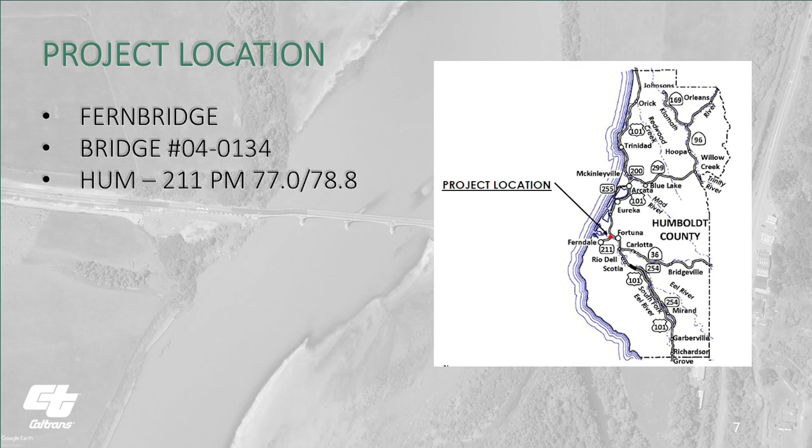In terms of project background, emergency repairs were made immediately after the December 2022 earthquake to restore essential traffic, minimize the extent of damage, and protect the remaining facilities. And now an improvement project has been initiated to identify solutions that will provide safe, sustainable, and reliable access to Ferndale. Update on seismic gates.

This is just a rendering. They were not installed just in the last 10 minutes of you all driving over.

So remaining work is the changeable message signs and the structure associated with those, cameras and poles. We are planning to have some nighttime traffic control in order to do that work. There'll be some crane equipment that will have to come in to place those items. We also have some monitor sensors on the structure that are currently not functioning that we need to replace. I believe, Ty could probably correct me, but I believe there'll be a specialized snooper truck that will go and put people underneath the structure.

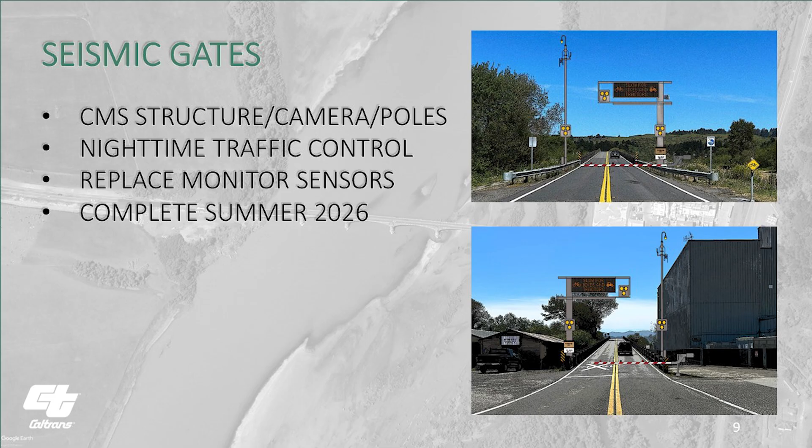I'm not certain if we'll be able to do that at the same time as the other equipment, so there could be, I'm hearing probably yes, a couple instances of traffic control in order to do both of those items of work. But we do hope to complete the work this summer.

In terms of the bridge survey, back in January of this year, we had some traffic control in place in order to do a three-dimensional survey of the structure. One of the main purposes was to establish a new baseline for where the structure's at in terms of crack widths and any potential movement in the future since doing the emergency repairs and some pavement and asphalt work that we had done. And we also set new control points to be able to do future surveys to use as a reference, and again, to monitor bridge movement.

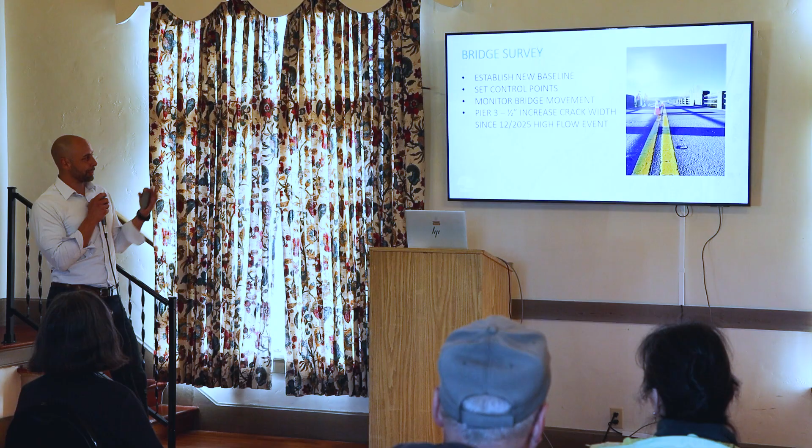In this recent survey we did notice approximately a ½ inch increase in crack width on Pier 3, and that was since the December high flow event that we had. We've since had another high flow event. We haven't done another survey since then, so we can't really predict whether we would expect to see any movement as a result of that, but just knowing that we are monitoring the structure, there's no cause for concern.

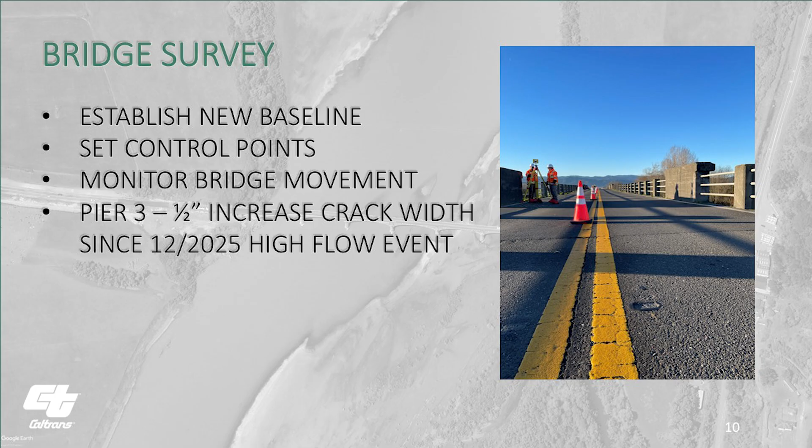Our bridge crews have inspected the bridge, and there's nothing that would need any emergency repairs or anything like that. But we just wanted to be transparent and let you know that's the recent update that we have based on that survey we did back in January.

We covered this last time as well. This is our timeline for project development. We start here in the planning phase. The last phase that we just completed back in August of 25 was project initiation. That document essentially developed preliminary cost, scope, and schedule for the project. And then in August, we kicked off into the project approval and environmental document phase, where we'll be preparing an environmental impact report under CEQA and what's called an environmental assessment under NEPA on the federal side.

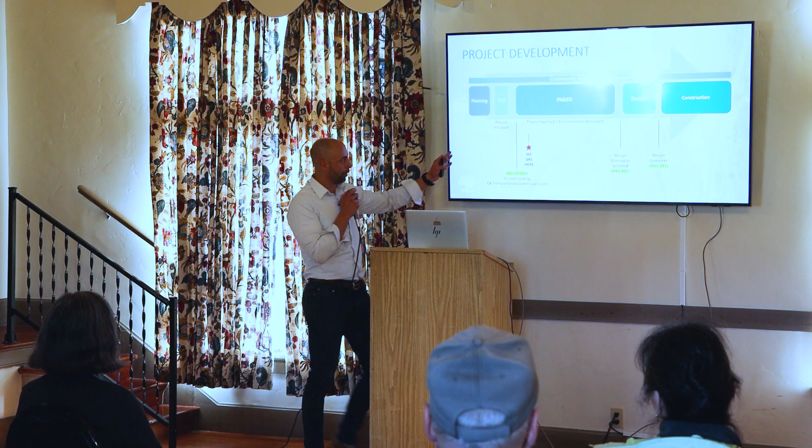So last time this red star was here, so we've gone a little further; it could slide a little further forward or back, but generally we've made some progress. This phase is targeted to be complete in April of 29. And by that point, the result would be we would have an alternative selected. That is the outcome of this phase, an alternative selected that would then move into the design phase to have plans, specifications, and an estimate prepared, which is targeted to be completed in April of 2031.

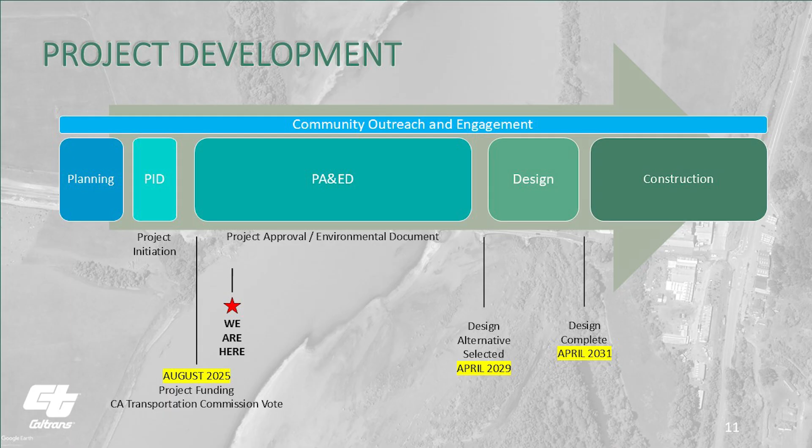And with that, contractors would bid on that plan package and it would be awarded to the lowest responsive bidder, and then we'd go into construction at that time. Timeline for construction is kind of a range depending on the alternative, and will continue to shift as we dive deeper into the project and understand more about it. Some of our timelines are a little lengthy right now, but we haven't yet gone through the effort of looking at ways of making the construction timeline more efficient and tighter to shrink it down. But we'll talk about that in a little bit.

So what is PA&ED, the Project Approval and Environmental Document phase that we're in now? It's a phase where we prepare an environmental document, we perform our environmental technical studies, we do preliminary engineering and alternatives analysis between all the alternatives that we're currently looking at. We do community engagement, which I forgot to mention, if you notice, community engagement spans all phases of the project. So that'll be something that never stops. We will always be engaging with you.

And on a project like this, more so than you would probably ever see on most projects that Caltrans is developing. We'll also kick off agency coordination with all the resource agencies, such as the Coastal Commission and other agencies that we will require permits from, and they'll have an opinion and say in the outcome of the project. And then at some point in this phase, we'll have selected a preferred alternative as well, concluding with an environmental document that's certified and approved.

Every project in our department has a very specific purpose and need. The purpose and need really drives everything that we do with the project, why the scope of the project is what it is. So this is almost the definition for what a project includes. So the purpose of this project is to restore reliable access to and from the city of Ferndale for all roadway users, which includes providing a structurally resilient bridge that meets current bridge design standards, reducing risk of damage from future events.

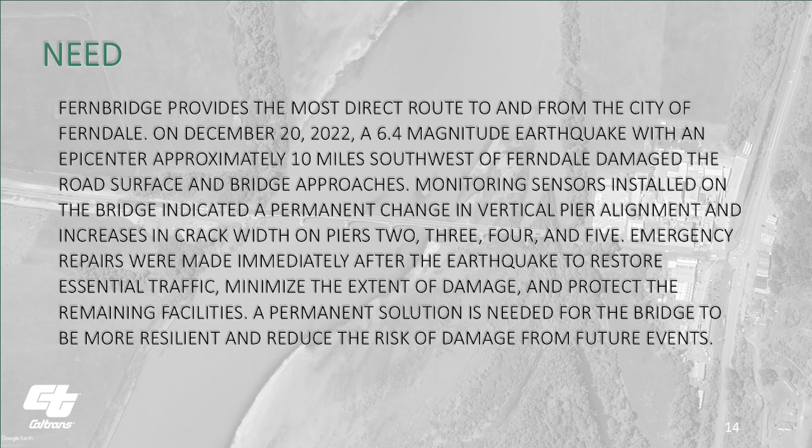Emergency repairs were made immediately after the earthquake to restore essential traffic, minimize the extent of damage, and protect the remaining facilities. A permanent solution is needed for the bridge to be more resilient and reduce the risk of damage from future events. So those two statements are really driving the scope and the work of what we're doing on this project.

Another topic that a lot of us are probably curious about is, are we going to be able to rehab the existing bridge, or are we going to have to replace it? And that's been something that we've been talking about, but we don't have the answer to yet. As we mentioned in our last public meeting, our teams are studying whether rehabilitation of the existing bridge to keep that bridge out there is possible. And if possible, what would this bridge look like? What would the scope of that improvement look like?

So some of the things that we're currently doing right now and will be doing to get to that, and also a schedule to bring a determination on whether it is feasible, and if it is, what it would look like. We're currently kicking off channel surveys with our survey crews to get topographical mapping of the channel between bank to bank.

We'll be doing geotechnical investigations to get soil samples, hopefully starting as early as this summer, potentially in the fall of this year, which is going to be critical for us to be able to do our structural analysis on the bridge to see if rehab is possible and what the scope of rehab would look like. We'll be preparing a foundation report from those soil investigations. Our structures team will be doing a scour and seismic analysis.

And a little note on this, typically at this early phase of a project, we would do a very kind of basic structural analysis to be able to determine what the scope of work would be. In this case, because this is a pivotal big answer that everyone needs to know in terms of rehab versus replacement, our team has decided to do a very intense analysis when it comes to the structures.

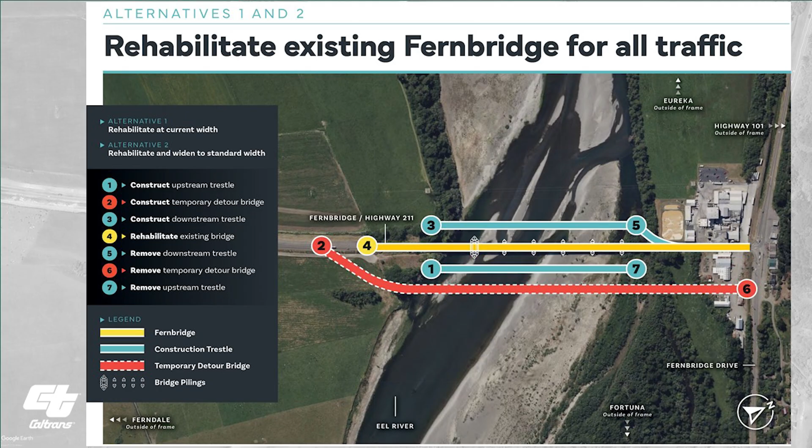So in these cases, you would expect that these lines would be much tighter because we don't need that much width. And I only want to say that because we're showing a new bridge over here through the depot and things of that nature. So that would get much tighter and closer to the existing bridge is all I wanted to say.

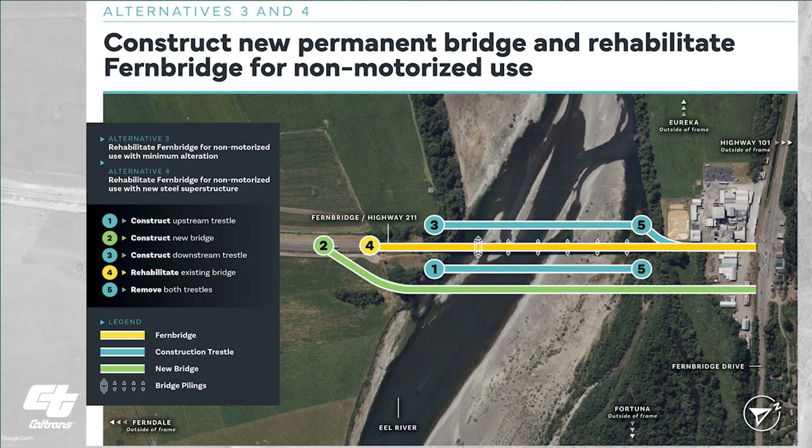So the difference between 3 and 4, alternative 3 would rehab for non-motorized use with very minimal alteration. And then alternative 4 would actually take the superstructure, or the top portion of the structure that has the roadway, and replace it with a new steel superstructure. That would be the difference between 3 and 4. Alternative 5 would construct a new permanent bridge and demolish and remove the existing Fernbridge structure. This one would construct a new bridge on a new alignment, however, even though the existing Fernbridge would be removed.

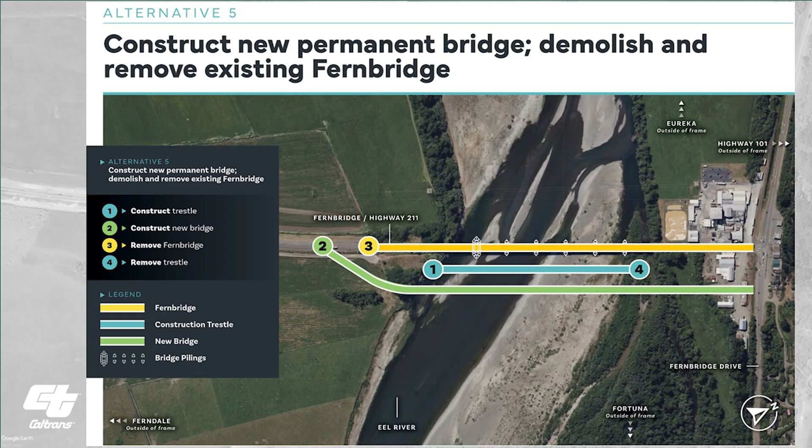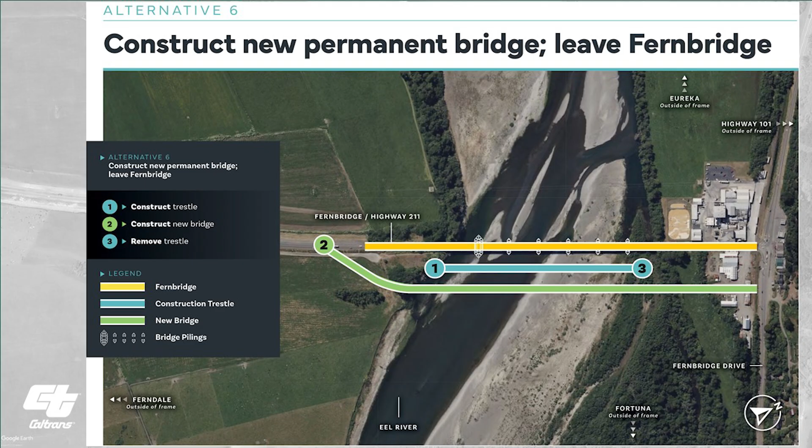Alternative 6 would construct a new permanent bridge, but it would leave Fernbridge. And what we've talked about here is some type of a monument. Whether that is keeping the bridge totally intact there or down to maybe only leaving piers in the water, that is the intent of this alternative. The challenge behind leaving a bridge intact that's historic and not getting maintenance is it's likely a liability because people can recreate under the bridge. So that's not really something we've discussed at length in terms of what does a monument look like. But so monument hasn't been defined, but that's what the purpose of this alternative is.

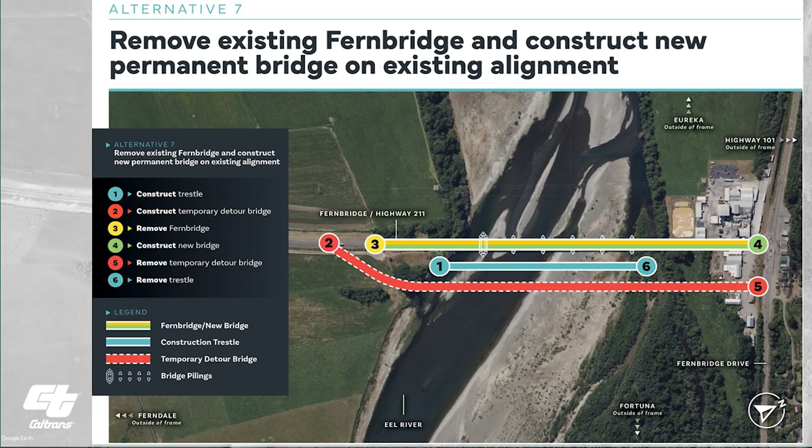And then finally, the last alternative, remove existing Fernbridge and construct a new permanent bridge on the existing alignment. So this one, the new bridge would replace and be exactly where we're driving on Fernbridge today. In terms of lane widths between the various alternatives, alternative 1, rehab the existing bridge with really no changes to the width. So it would just remain with 0-foot shoulders, 11-foot 4-inch lanes, and no separated pedestrian path.

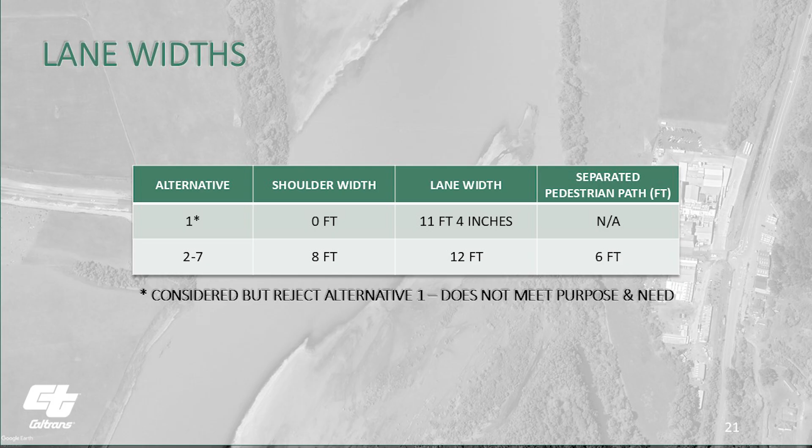There's an asterisk on that because we're actually recommending to reject this alternative, with the clear reason that it doesn't meet the purpose and need. The purpose and need is intended to serve all road users, pedestrians, cyclists, motorized vehicles. That alternative does not do that. And so we are officially now recommending to remove that alternative from the alternatives being considered. And that's why that's there. Alternatives 2 through 7 do incorporate 8-foot shoulders, 12-foot lanes, and a 6-foot separated pedestrian path.

In terms of replacement alignment, so when we're looking at alternatives that propose to replace the bridge, not like Alternative 7 on the existing alignment, but off alignment, we are focusing our efforts now on looking at an upstream alignment. Through our preliminary studies and reviews of the site, any other location is going to have much greater impacts to coastal ag land and take ag land away from the community by rerouting the bridge and 211. Also increased impacts to wetlands, higher construction, higher mitigation cost, much more additional right-of-way, as well as increased in-channel impacts due to additional temporary trestles that we would need with a new structure that's much further away from the existing.

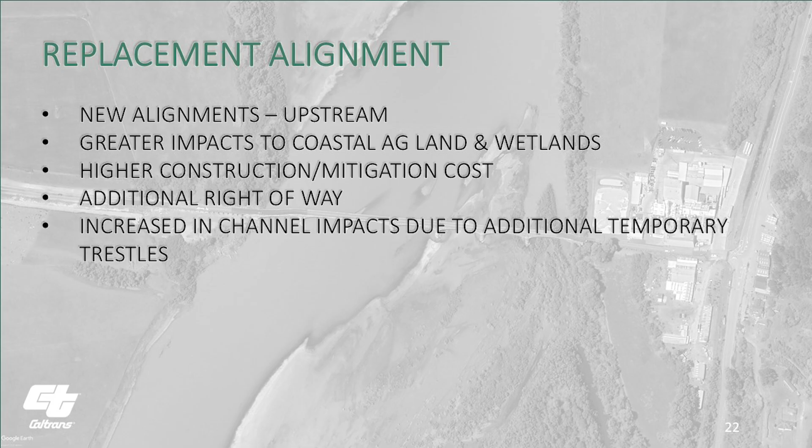So I know that's something that has come up in past meetings where it was asked about and we weren't really ready to answer that question yet, but we are fairly confident now that that is the most logical point for our new structure. We will still be studying the entire environmental study limits that we've identified, which go much further than just that upstream alignment, but that is where we're seeing it likely makes the most sense for a new structure if you have to build it in a new location.

I'll run through that construction staging example really quick just to help it make sense for everyone. So this says alternatives 1 and 2. We are recommending now that alternative 1 is not going to be an alternative further considered. So really you just focus on this for alternative 2. This would be rehabilitating it for all traffic with a wider standard width.

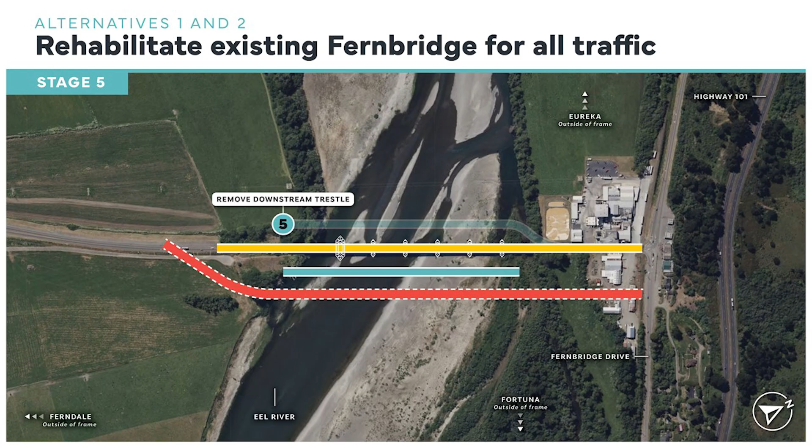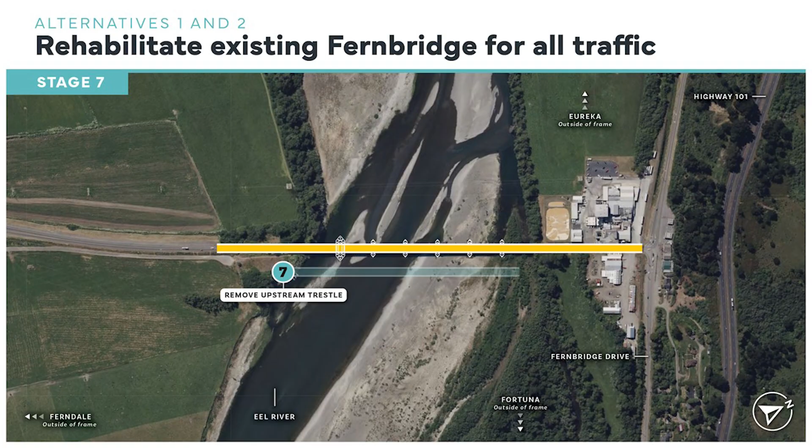Stage 1, we would construct the upstream trestle. Stage 2, you would construct a temporary detour bridge. Stage 3, construct the downstream trestle. Stage 4, you'd rehabilitate the existing Fernbridge. Stage 5, remove the downstream trestle. Stage 6, you would remove the temporary detour bridge. And then 7, you would remove the upstream trestle and be back driving on the route you're all familiar with.

All right, now on impacts and mitigation, in terms of how we're going to deal with that on a project like this and others, first we try to avoid impacts to the extent we can. And for what we can't avoid, we try to minimize those impacts. For what we can't avoid and can't minimize, we then look on site within the project limits to perform on-site restoration for mitigation to offset those impacts. When we do mitigation and restoration on site, we have typically 1-to-1 mitigation ratios or much lower mitigation ratios, which brings about a lower cost.

And what we can't then mitigate on site, we then look for an off-site location to mitigate. Those come with higher mitigation ratios, much more mitigation that we have to do with respect to the impact we're having. So that also drives the cost up. And just a note, we are expecting to have both on-site and off-site mitigation for this project.

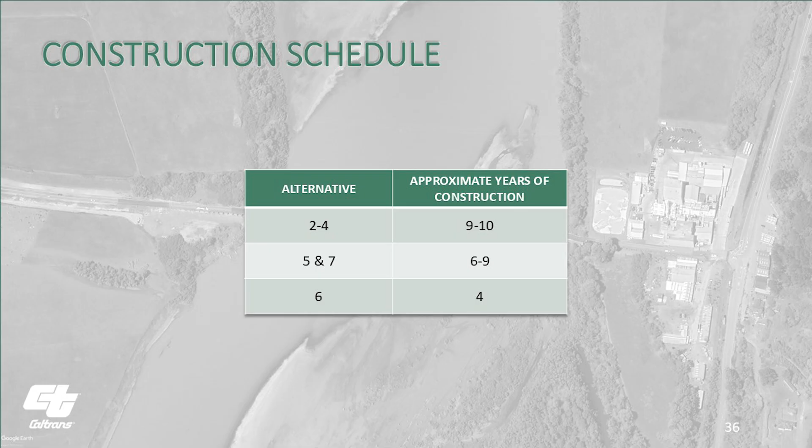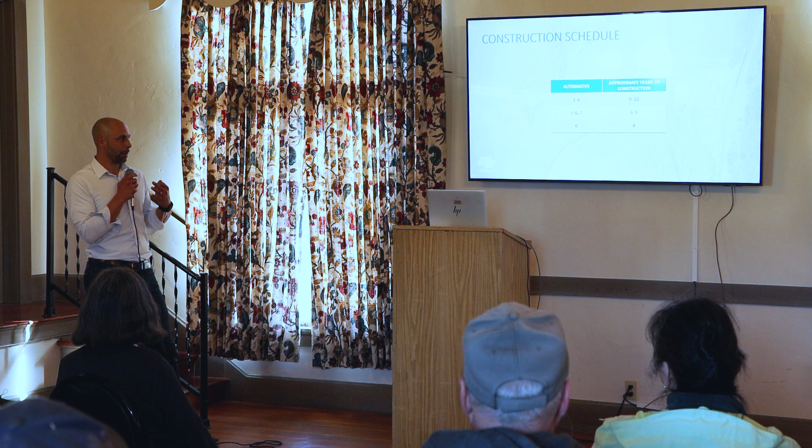In terms of the construction schedule for alternatives 2 through 4, right now, and don't be too alarmed, but 9 to 10 years for those. Alternatives 5 and 7 are estimated to be anywhere between 6 and 9, and then alternative 6, approximately 4. I do expect these numbers to shift as we get further into development, and there is no doubt an interest and desire to reduce those significantly. So that's where we're starting at, and that's definitely a topic of how can we reduce those. But that becomes also easier as we focus in closer onto a preferred alternative to focus our efforts on how we're going to also shrink that time frame.

In terms of the capital cost of the project, for alternative 6, we're looking at construction and right-of-way capital. And when I say capital cost, that is the cost to construct, the cost to acquire right-of-way, the cost to do our mitigation, the cost for our permits. It does not include my time, Dominic's time, Andre's time, Bree's time to go and design and develop and study this project. So the support cost for staff is not included in that. That's just the construction and right-of-way capital components of the project.

So alternative 6, approximately $220 million. Alternatives 1 through 4, which alternative 1 is no longer an alternative we're studying. So 2 through 4 and 7, approximately 270 to 360 million. And then alternative 5, approximately 240 million. These numbers will also change as we get further into the project, which is the reason why they're rounded and the reason why we're giving you ranges as well.

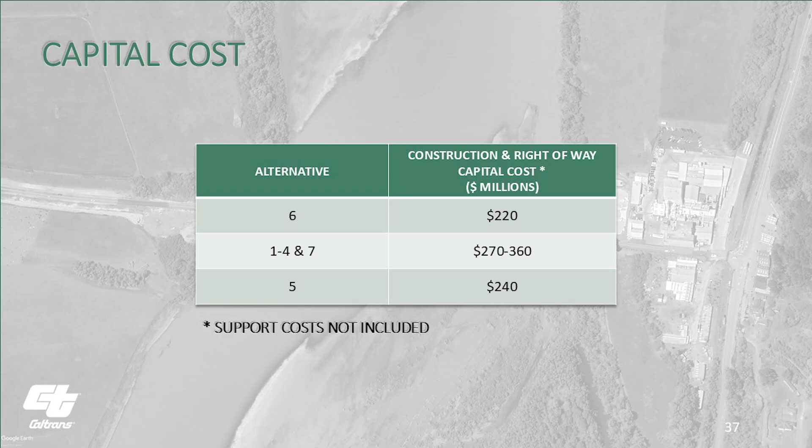And now how to comment. So you can submit a public comment today. We have the comment cards and you can leave it with us, or you can mail it in, and they must be submitted by 5 p.m. on April 17th. I believe also you can submit a comment by email, and you can also submit a comment on the engagement portal. So that 5 p.m. April 17th deadline would apply for all of those various mediums to leave a comment. If you mail your comment in, you're going to mail it to Caltrans District 1, attention Brianna Calson at 1656 Union Street in Eureka, 95501.